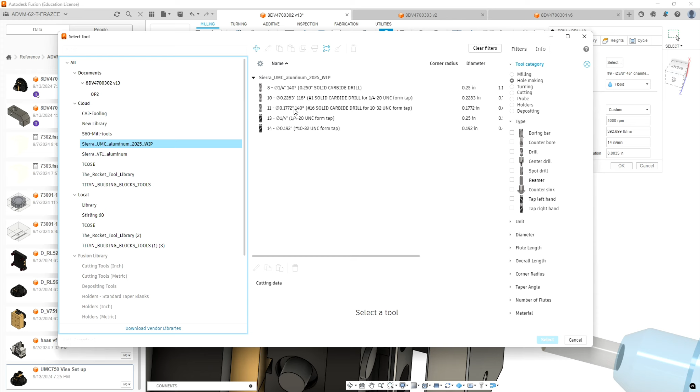So we're going to go to drilling. We're going to select from our tool library the number 11 tool, which is the number 16 solid carbide drill for 10-32 form tap. We're going to select that tool.

4,000 RPM is fine, 16 inches a minute. Again, round this up to 40 for retract.

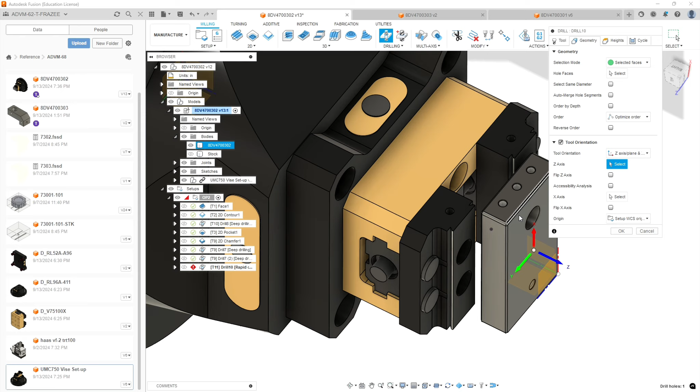Geometry - we need to select our tool orientation, and it's going to be the same as what we did before. We're going to do Z-axis and Y-axis. So we want to select the face, and then our Y-axis this direction, and we want to flip our Y-axis. This needs to match the previous segment. So if you're confused, go back to the previous segment. Make sure that the axis orientation is the same as what you see on this screen.

Otherwise, the table's going to rotate the wrong way. You'll still be able to drill the holes, but you won't be able to see them. They'll be on the other side of the part.

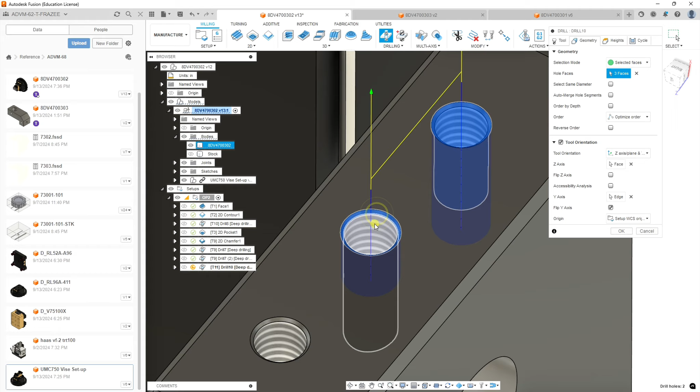And now we're going to select our geometry, and it will do the holes in order of the depth that they are. So the fact I modeled the one in the middle deeper gives it the clearance to go all the way through.

Alright, so we're going to go to heights. We're going to go from stock top. We're going to deselect fixture top. And we're going from the hole top to the hole bottom.

We're going to break through at the tip, and we're going to go an extra. So this is a 32 thread pitch, so if we need to go 4 or 5 threads deeper so that our tap doesn't hit the bottom. So we have 1 divided by 32 times 5. So we need to go 156 thousandths approximately deeper.

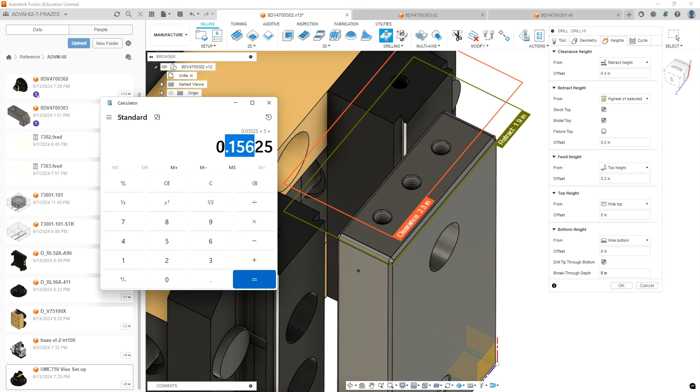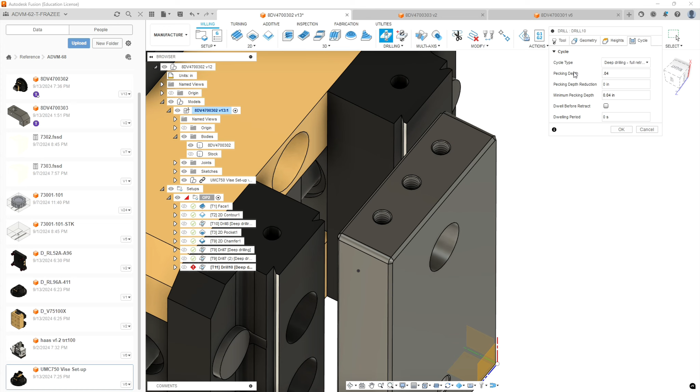Into the hole with our drill bit. Okay, and our cycle is going to be a deep drilling cycle again. We're going to do, 40 thousandths is a smaller drill, so that's 40 thousandths steps is good. Okay, so then we got our drills.

All right, now we're going to move on to our tapping.

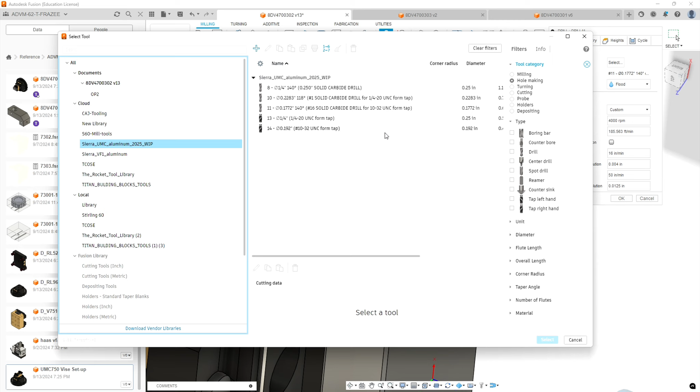We're going to drill. We're going to select from our library our 10-32 form tap, tool number 14. We'll leave it at 500 RPM. I don't like pushing taps, they break and then you have a bad day.

We need to set our tool orientation first. So again, we're going to do Z and Y. We're going to pick our Z-axis orientation, and flip the Y-axis, and this needs to match the previous operation. So if you are not sure, go back and check it.

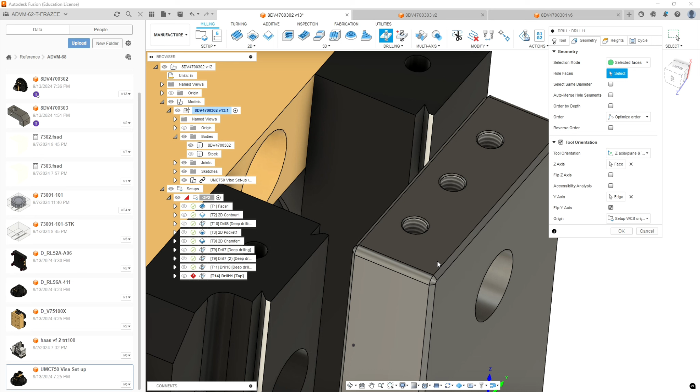Alright, we need to select our geometry. So we're going to select our holes. If you have chamfers, you're going to want to select those because it sets the top of the hole.

Then we're going to go to heights, and again we're going to stock top, but we're going to deselect fixture from there because that's pushing it way higher than we need. Okay, we're going to go from top height, we're going to go from hole top, we're going to go hole bottom.

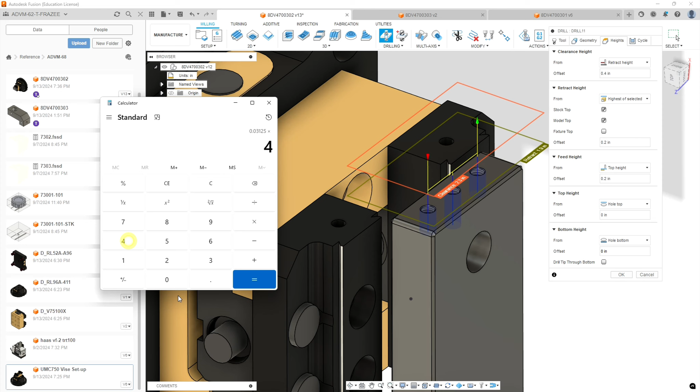And then we need to go, so we're going to go four times deeper, not 5 times, so we don't want to go all the way to the bottom. So remember, it's 32 threads, so in 1 inch we got 32 threads, and we're going to go 4 times. And so we're going to go an extra 0.125 deeper, and that way it ensures we have fully formed threads for what the whole design was.

We're going to go negative 125. Okay, we're going to go to our cycle. It's tapping. We'll leave that at default and hit OK.

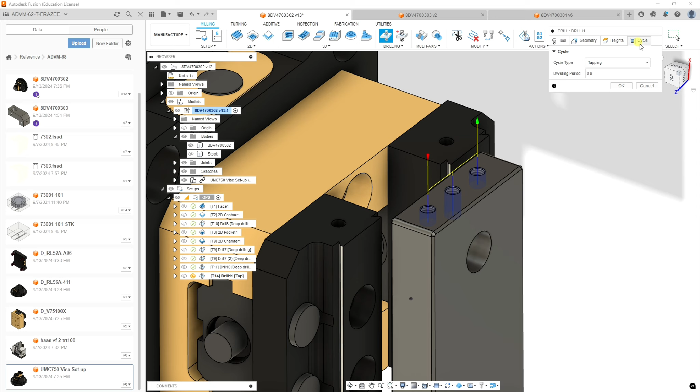Okay, we now should have made all of the features we needed on 5-axis. Now, the next setup is going to be op3. We're going to go back to a traditional 3-axis mill. Mill the back off, drill some holes, do a chamfer around the outside edge, and this part will be completed.

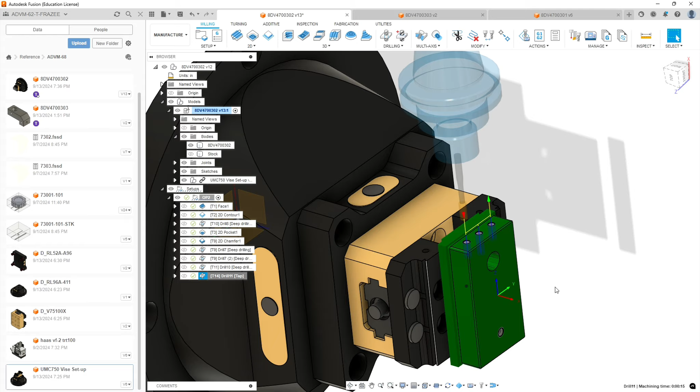Okay, here we go. We're on our last setup here for this part. We're going to put it back in a traditional mill, and we're going to mill off this hat and put on the chamfer.

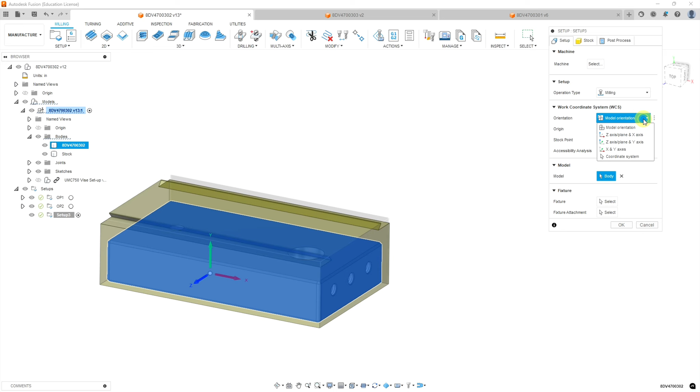Alright, so let's make a setup. We're going to do a new setup, and we're going to select the model of the part number. And we're not going to use model orientation. We're going to use the Z-axis plane and X-axis. So I'm going to pick the face of the stock, and then we're going to have to hide the stock.

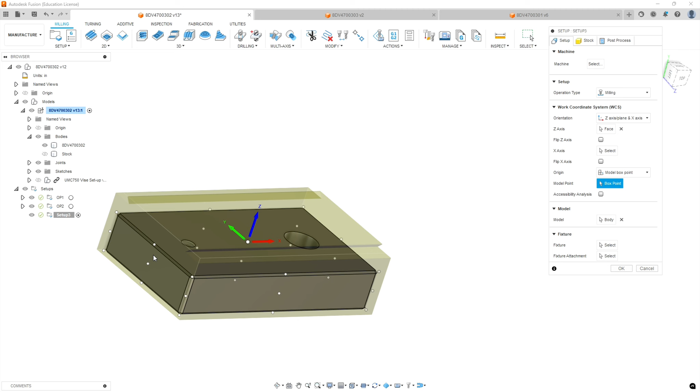And we're going to be using a model box point because we've already machined the base of this thing. We want to base our registration off the machined part, not the stock, even though we've got this hat on top. So I'm going to pick the left-hand corner, and our X-axis, this looks like it's going in the correct direction. So how we achieve this is we're going to set up a 1,2,3 block on some parallels.

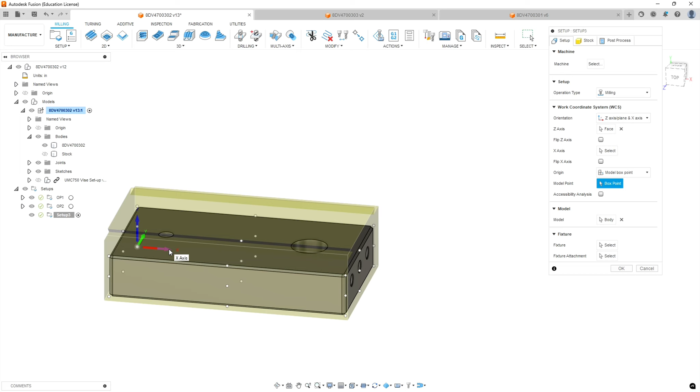You're going to edge find or probe on the corner of that block, and then use the top for your Z height, and then take the block out, and then we compensate 1 inch for the thickness of the block. Okay, so

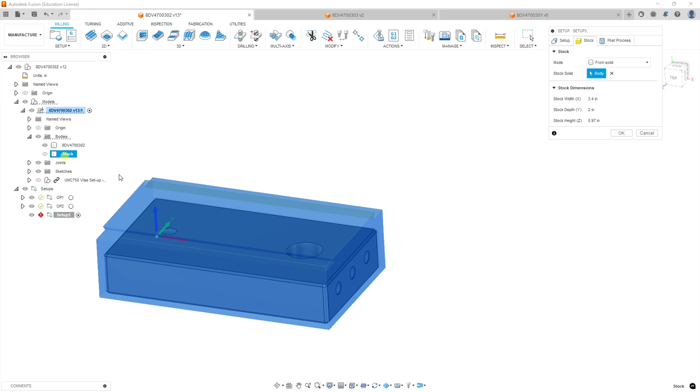Now on our stock tab, we aren't going to use it from the previous operation. That was a full 5-axis move. We'll go ahead and go from solid, and we're going to select our stock model for that solid.

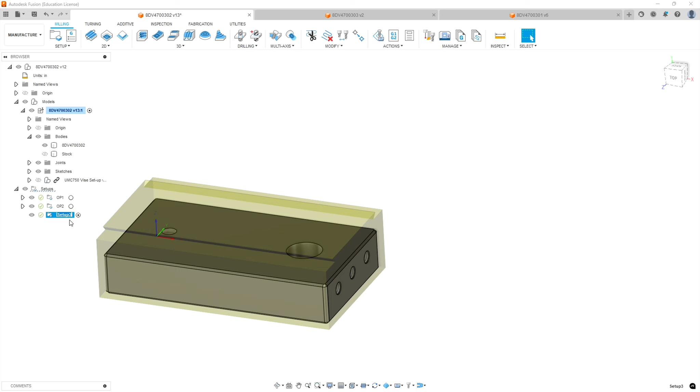Okay, we're going to post process. We're going to call this 3023, the third operation, op 3 for VF1, and we're going to just use work coordinate system 1. And let's go ahead and change our name so it's consistent.

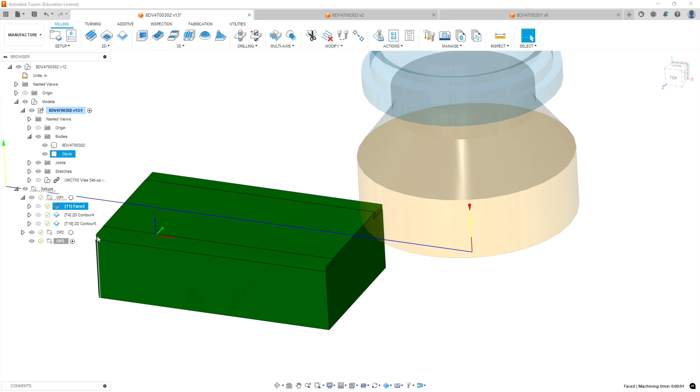Okay, so now we're going to use a face mill. We can actually rob the routine. We can copy it from op 1, paste it in op 3.

We're going to have to do some modifications though. So the total amount of material we're removing is from the top of this dovetail feature to the top of our finished part. So that distance is 340 thousandths.

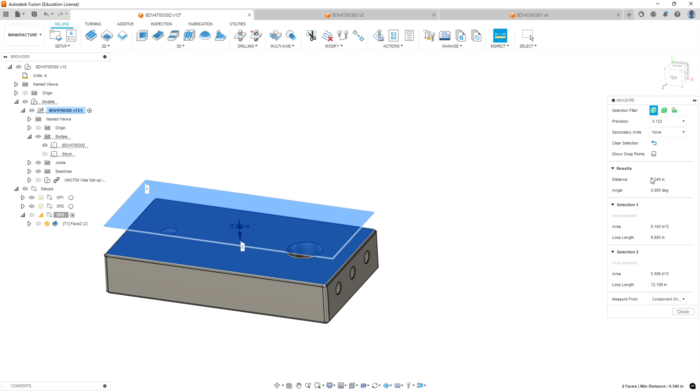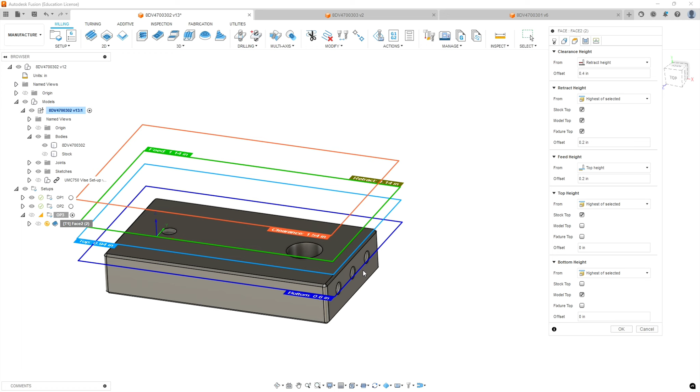So this face mill, the geometry is fine. On the heights tab, we're going to start at stock top, and then our feed height is going to be stock top, and our bottom height is going to be the model top, so that's correct.

On the next page, our pass directions, extensions, that can all stay the same, but we're going to do multiple depths this time. And it'll be 60 thousandths for this cutter. And we're going to use even step downs.

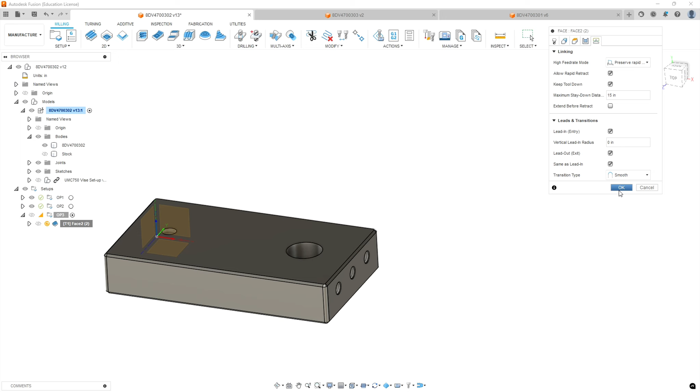Okay, extra decimal point there. And we'll just leave it at that. That cutter does pretty well. We're going to keep all these the same. And hit OK to remove the hat on top. That's about right.

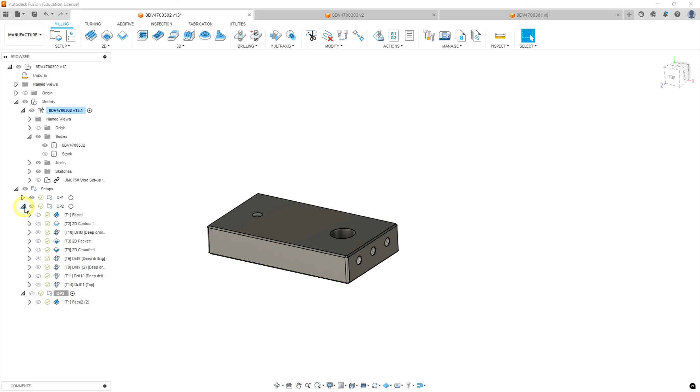Alright, the only other feature to make is the buzz around this thing and make this chamfer on here. We actually did that in op 2. You could rob it from there, so let's open up 2, even though this is done on the 5-axis.

Copy paste, we're going to go edit. We're going to leave all this at default, except we're going to deselect the geometry we selected before. We're going to select the chain we want from this side. Go to heights, we can leave all this at default. Go to passes, we're going to leave all this at what we had our settings last because we copied it. Linking, should be able to leave this all the same as well. Hit OK.

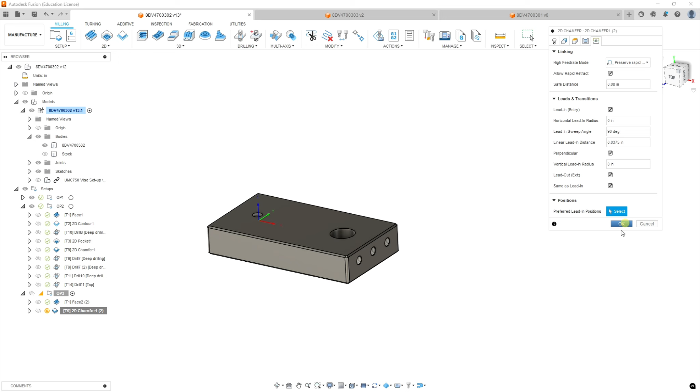And we have a chamfering around. Now in reality this material's not here, that's already been milled away. And that's it. That's it for this part.

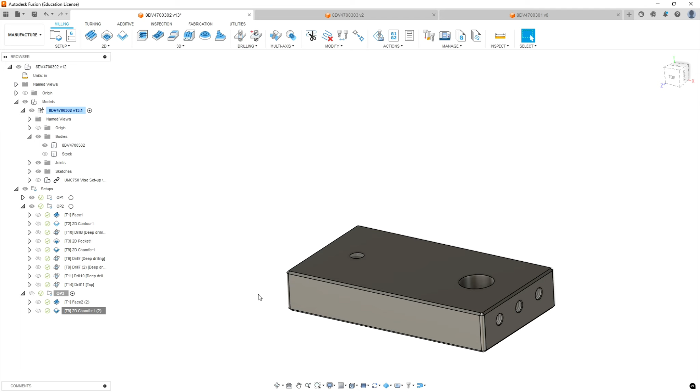So what you need to upload is 3 setup sheets and 3 programs. I want to see a program for your prep op, your 5-axis work, and op 3 should be back on a traditional milling machine, a 3-axis milling machine. Once you have all that, you'll run a proven program for op 2, and op 3 you will run your own program on the machine, and you'll set up on a VF1 to finish that off.